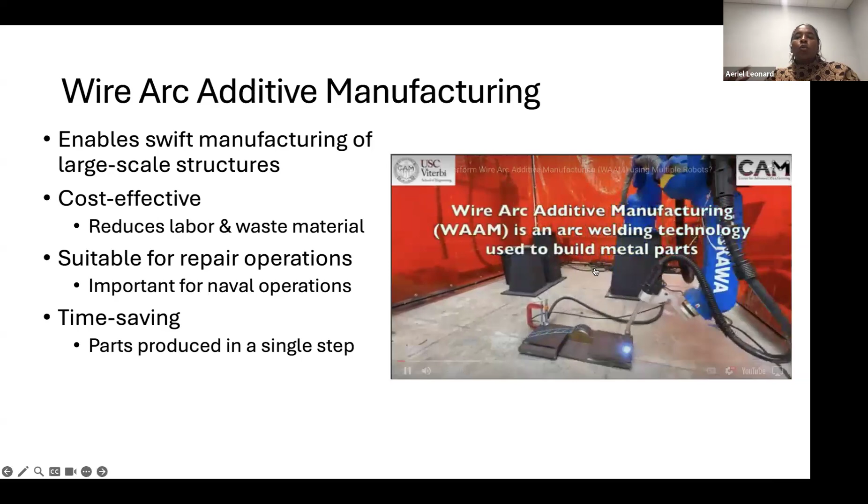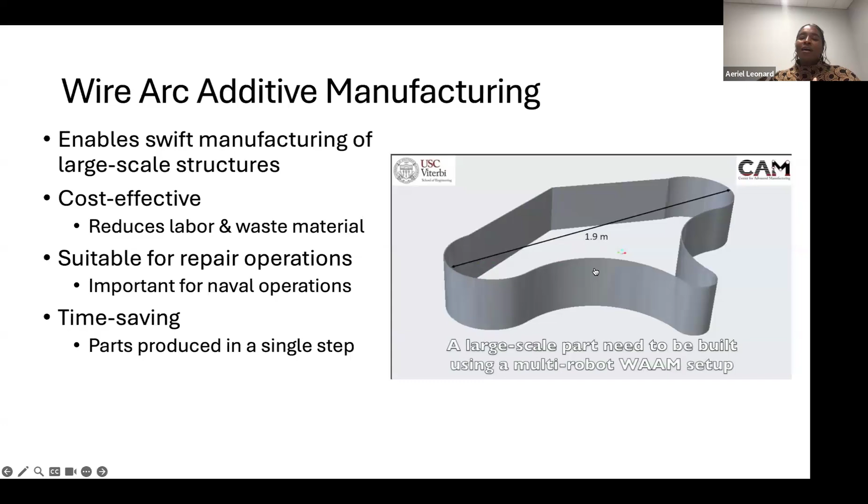So specifically, wire arc additive manufacturing is a way to print large scale structures. We kind of discuss wire arc additive manufacturing as this new innovative thing, but it's really just welding in a way. But because of the nature of the printing, you can really build these large things using robotic arms. Ship propellers are quite large, and this is a way to build those components.

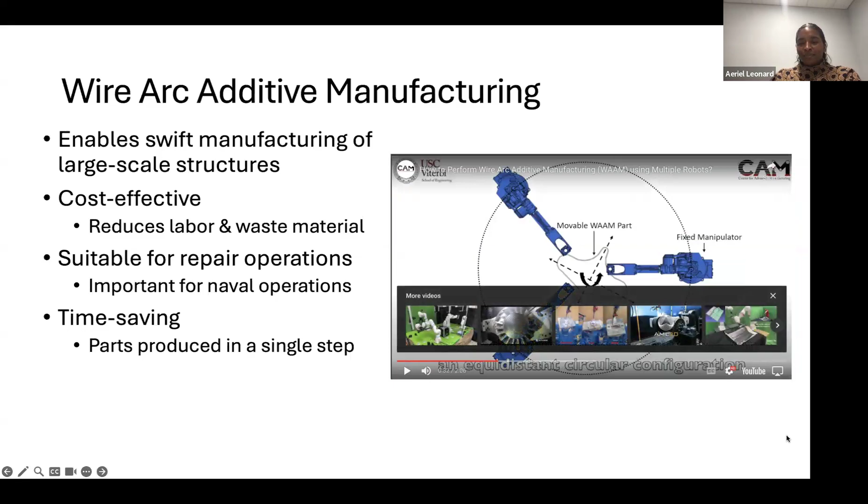So when you think of nickel aluminum bronze, it's this copper-based alloy. It usually has additions of iron and manganese, which are done to change the phases you get during processing. But it has excellent corrosion behavior, strength, and wear resistance. So if you think about things like ship propellers or underwater fasteners, it's a very good alloy that lasts a long time. It's actually quite old.

Some of the first literature on nickel aluminum bronze was from the 50s, and a lot of it was studying things like tensile behavior, understanding composition effects on that, as well as corrosion behavior. But in today's time, it would be considered a complex alloy—a microstructurally complex alloy and a compositionally complex alloy. A lot of that is because depending on how you change the composition, you can get very different phases.

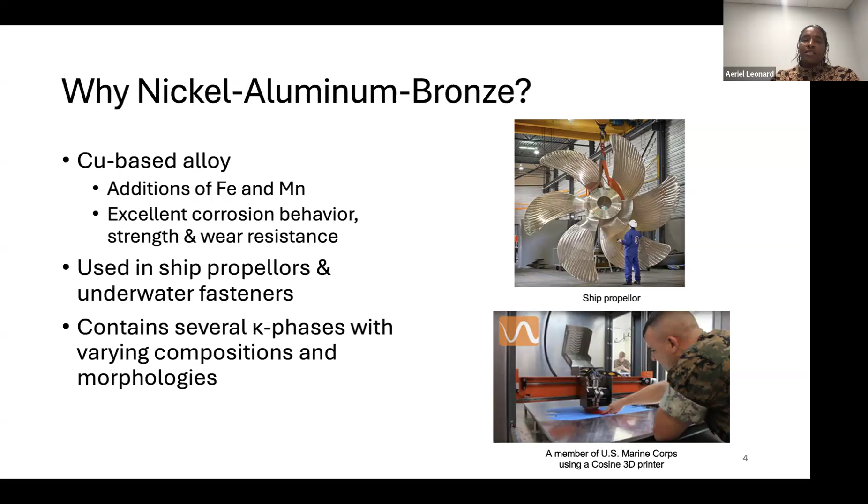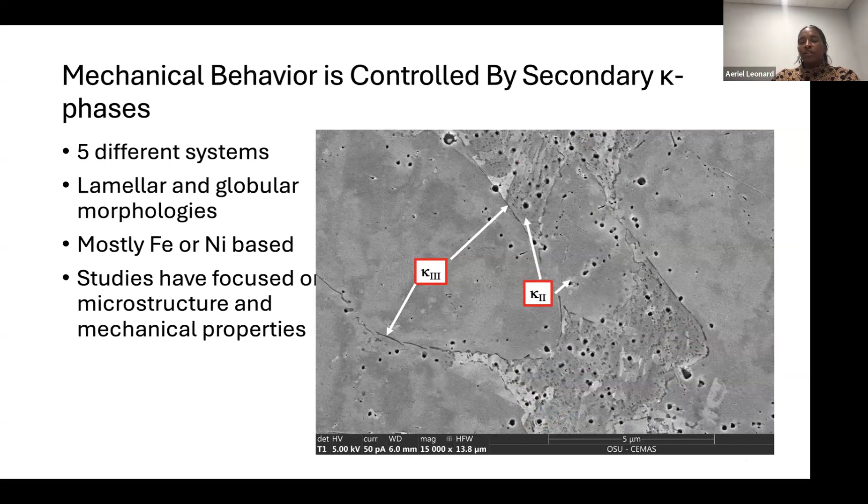Some of the most important phases are these kappa phases. In general, these secondary kappa phases have about 5 different systems. They can vary in morphology—lamellar, globular, spherical—and are mostly iron or nickel based. We'll talk a little bit about them going forward. It's very well understood that the microstructure and mechanical properties depend very much on the presence of these kappa phases, as well as their distribution throughout the material. So they're very important in understanding deformation mechanisms.

When we look at wire arc additive manufactured nickel aluminum bronze versus a cast and roll system, some of the things you can really see is that the microstructure is coarser.

One thing that happens in the cast and roll conditions is you get these large globular asymmetrical shape precipitates known as kappa 1. You do not see kappa 1 in the wire arc additive manufacturing condition, and that's because the solidification rate is much faster, so you don't have the opportunity to precipitate out that phase. It's very good from a mechanical property standpoint because this is a brittle phase.

And so a lot of crack initiation usually occurs at these large kappa 1 phases. Another thing you see are these lamellar type structures called kappa 3. Kappa 3 is a nickel-based incoherent phase in the material. Then you can see kappa 2 here, which are these larger globular phases that are also iron-based. And then there's kappa 4, which sits within the matrix of the material.

So I'll talk a lot about this later, but when we started on this project, our goal was to really see what is the fatigue behavior and how is that being driven by the observation of these different precipitate systems in the material. If we change the processing conditions in the wire arc phase, how do we change the microstructure? And then how does that influence things like fatigue?

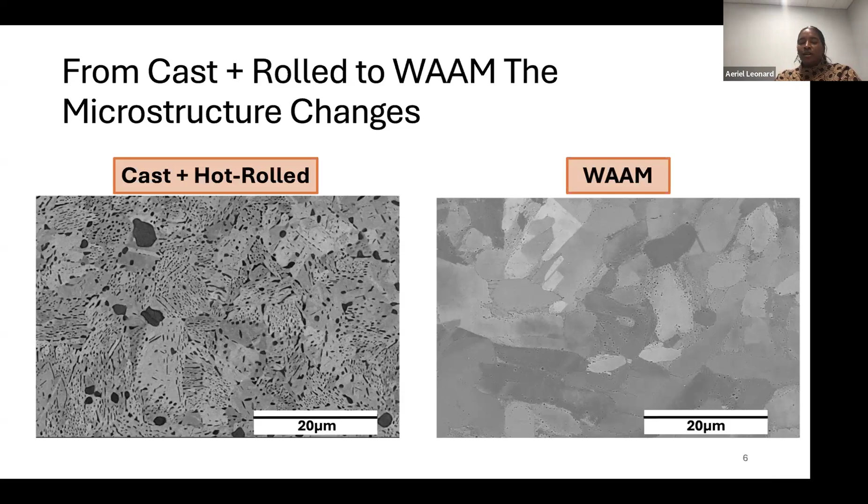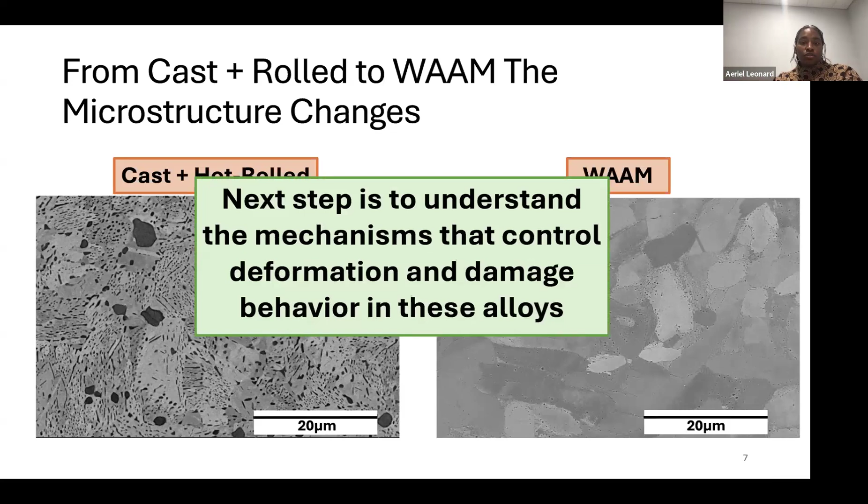But from really having an understanding that the microstructure between the cast and roll condition and the wire arc additive condition is different, really the next step for us is to truly understand the mechanisms that control deformation and damage in these alloys. So next, I'll talk about some of the materials that we've been using.

So this is wire arc additive manufacturing, and that's the composition of the wire. If you ask me about the WAAM conditions, I can't tell you too much about it because we get these made by a company called Gefertec, which is a German-based company that has pretty much perfected the printing process of nickel aluminum bronze, so they don't share much.

And it's really because of the nature of AM, so you're reheating, remelting layers, and so you're getting different heat affected zones. Solidification rates may change because of this reheating and remelting. And so it is well known that you can get varying microstructure along the bar, especially along the thickness of the layers.

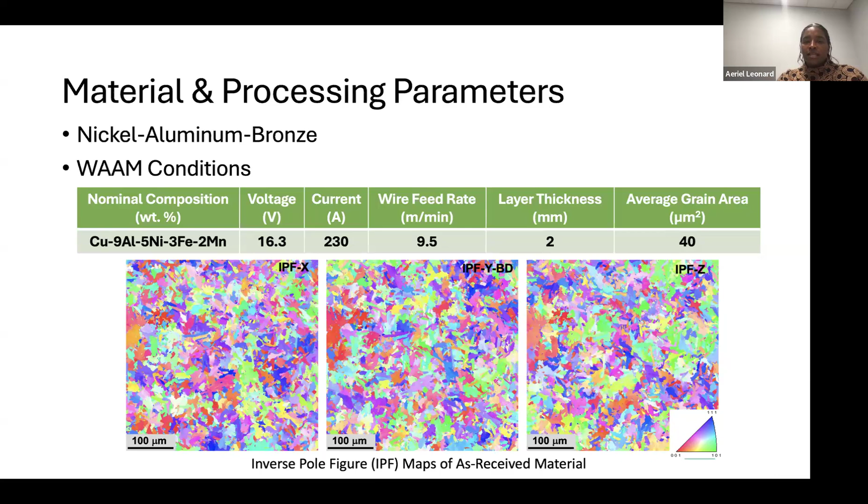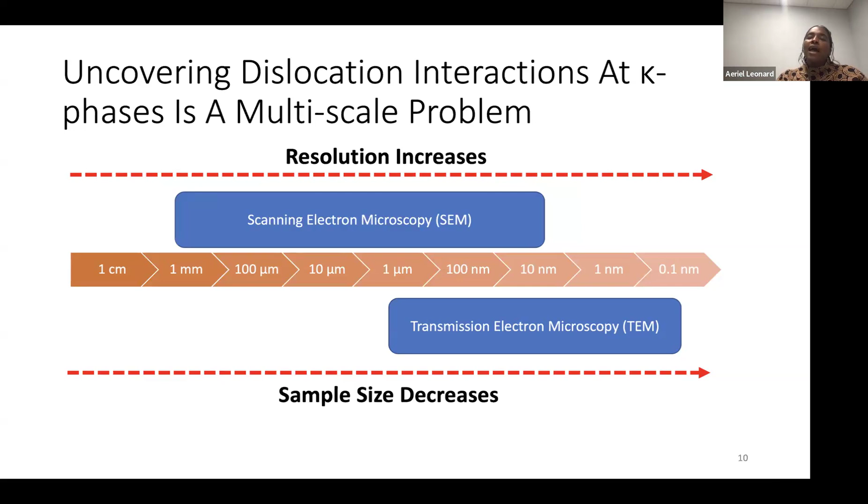As I talked about before, a lot of the limitations, even though this is a very old alloy and we don't fully understand the dislocation interactions, come down to the tools we had to understand this behavior. Because CEMAS has STEM and similar tools, we can see on an atomic scale how deformation is proceeding, which helps inform what's driving the deformation behavior. That helps us design an additive manufacturing process to get this microstructure consistently, or if we're repairing a part on a ship, to have the right parameters to achieve the same microstructure with good ductility and strength.

Next I'll talk about dislocation precipitate interactions during tensile loading. We wanted to start by getting an idea of the tensile behavior so we could provide better insight into what we'd see in fatigue. What we're learning is that the behaviors are actually quite different, and I'll talk a little about the fatigue behavior at the end. But that was our first introduction, really understanding the stress-strain behavior to inform us as we start cyclic experiments.

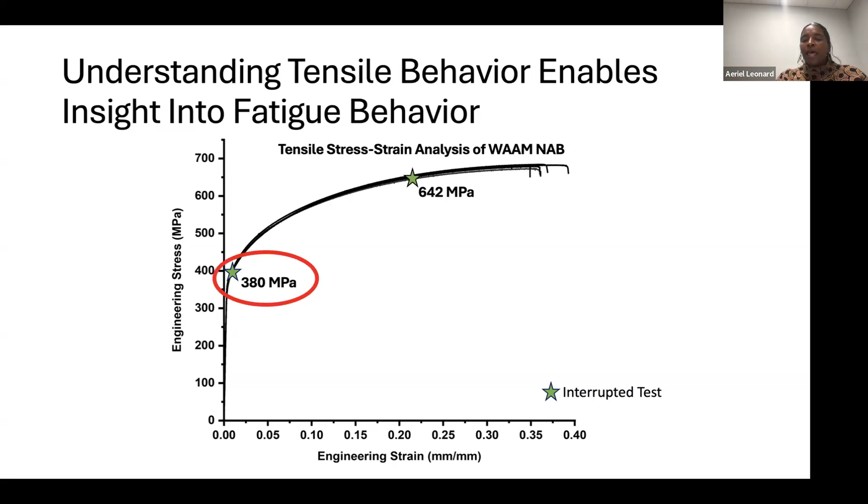We tested several samples to get a true understanding of the tensile behavior, then interrupted tests either at the yield or near the UTS to see how changes in strain affected the dislocation behavior as it progressed throughout the material. We'll start by looking at the sample interrupted near the yield stress.

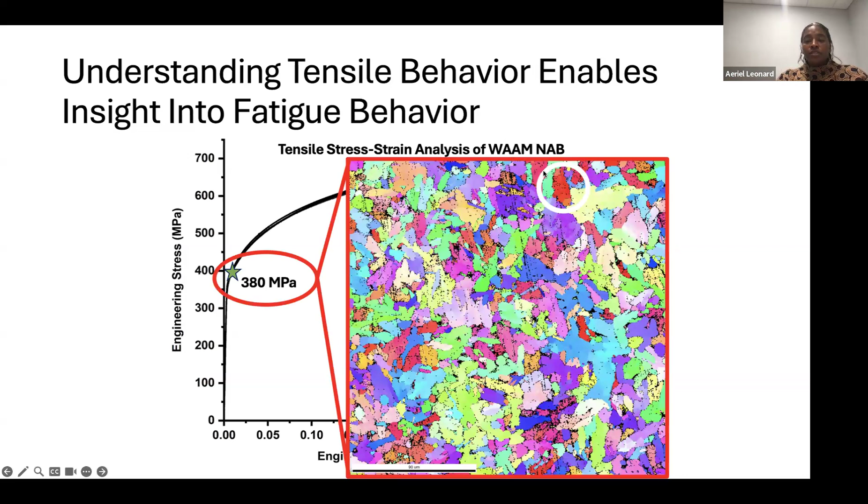This is the as-deformed microstructure in this area, and this is the region of interest where we did a lot of deep characterization to get a true understanding of the deformation mechanisms.

Seeing the stacking fault ribbon was extremely interesting because, of course, slip bands are expected to occur in the material, but after combing through the literature for months, we had never seen anyone report stacking fault formation in this material. We hadn't seen stacking faults mentioned even in newer literature from around 2023. So that was in the back of our minds: we're seeing stacking faults, and some interesting things are going on.

Another thing we noticed was Kappa 4 - you can see a small nanoscale phase sitting in the matrix. I have better images elsewhere, but we also noticed larger precipitates sitting along the grain boundary, which become important because a lot of the old literature, and even some newer literature, reports these.

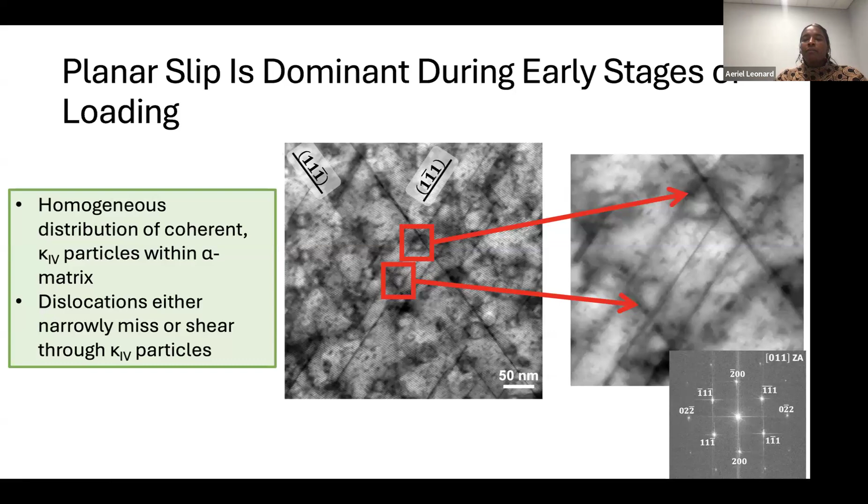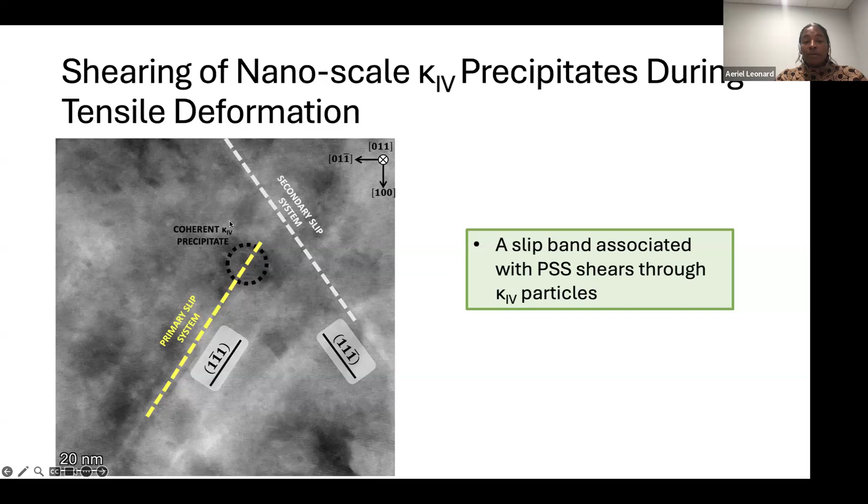If we take a closer look, here is our Kappa 4 particle with dislocations traveling along the primary slip system. We can see that the primary slip system shears through the coherent Kappa 4 particle - it's clearer here - and then we can see there's this secondary slip system.

And the region here is really undistorted. So it lets us know that that dislocation does not intersect the secondary slip system, and that there's some interactions between the stress fields of those dislocations that's preventing that transmission.

So again, we're starting to see some of the hardening mechanisms that are occurring at these early stages of loading in the material. Now, if we take a closer look, if you're familiar with center of symmetry analysis...

What it's looking at is how the atomic positions are deviating, calculating this M sub n parameter. The higher that parameter is, the higher the deviation in the atomic positions, meaning you have some deviation in the stacking sequence. The lower that number is, there is no deviation in the stacking sequence.

So by performing this center of symmetry analysis, what we learned is that we have a full dislocation that's separated into two partials. It's not hard to believe, this is a copper-based alloy. And the leading partial shears through the precipitate, leaving behind an intrinsic stacking fault.

What happens, and we know this from looking at samples at higher plastic strains, is that the trailing partial stays behind. It's almost stuck, pinned at the interface here. And they never actually recombine, as we'll see in later images. So the stacking fault stays in the material.

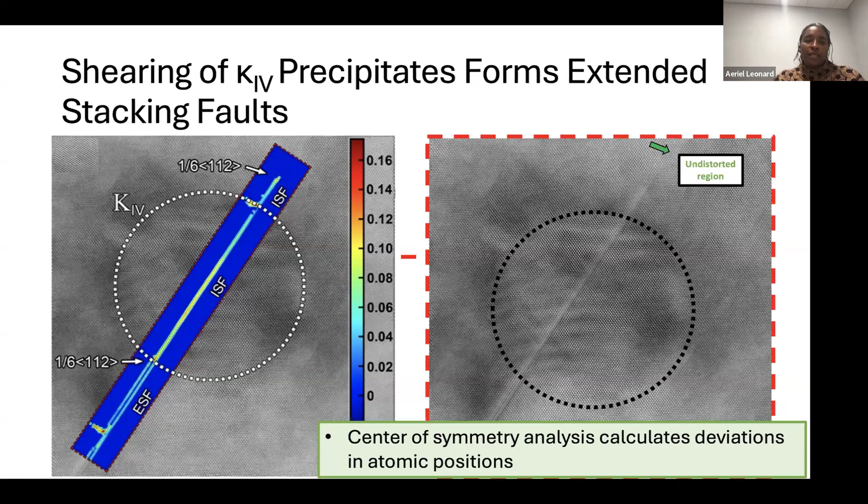We also learned that we have these extended stacking faults. We can see here outside the sheared precipitate that we have this extrinsic stacking fault. And we'll talk a little bit about what we think is happening to form extrinsic stacking faults in the material.

Now, one thing I talked about earlier was that we were seeing these grain boundary precipitates in the material. And what we had learned from literature was that people were referring to this as a new phase called kappa 5.

Through a lot of work, what we learned was that there was a zone of about 200 nanometers from the grain boundary that was depleted of these coherent kappa 4 particles. You can kind of see here the coherency strain, or the coffee bean contrast that you normally see from coherent particles in the matrix. And you can see within this region that there aren't any of those precipitates, and that you have these very large, flat precipitates sitting in this zone.

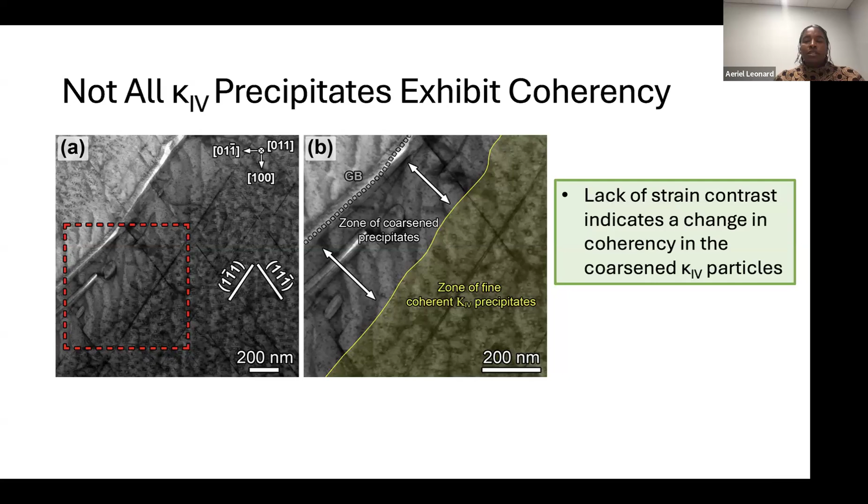And what we learned was that those were coarsened kappa 4 particles, and that they did obstruct dislocation motion. The reason why they obstructed dislocation motion is because they weren't just coarsened kappa 4 particles by themselves. They actually had the segregation of nickel and aluminum at the interface, so they were this shell-like structure with a kappa 4 core and nickel aluminum segregated along the interface.

This was not actually new. Even papers into the 70s had reported this coarsening and segregation of nickel and aluminum along the interface. And really, what we learned through looking through the literature is this actually was a heat treat phase that could happen at 350 degrees Celsius.

And it was very interesting because in the wire arc additive manufacturing process, the chamber itself is kept at 350 degrees Celsius. So it was right, we didn't plan that. It was right on with what older literature had seen. So we knew that this was a heat treat phase that was actually happening during the processing.

So in the wire arc processing procedure, if we're printing 10 bars, the first layer of each bar is printed, and then the second layer of each bar is printed. So because we're holding the chamber at 350 degrees Celsius until the last layer is printed for every bar, it's pretty much getting a heat treatment as the printing process is progressing.

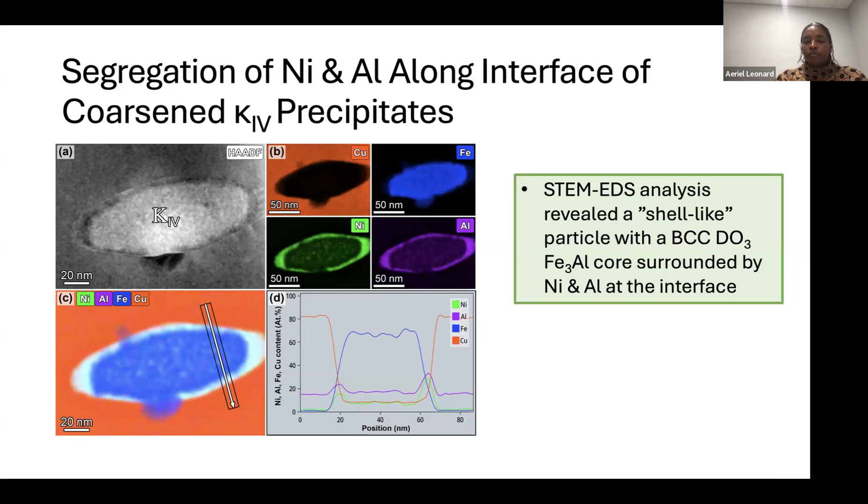So basically what we were seeing was the coarsening of kappa 4 and the segregation of nickel and aluminum along the interface. When we took a closer look, in general coherent kappa 4s have the Nishiyama-Wasserman relationship with the alpha matrix. What we learned with this shell-like composite particle was that it created an 8-degree misorientation between the cubic axes of the matrix and the composite.

So it deviated from this Nishiyama-Wasserman relationship. And what we learned through some of the more characterization that we did was that this did hinder dislocation motion. Now, does it have a large effect on hardening? Not so much, right? It's very few of them, and they are really few of them at each boundary as you go along.

But it was an important finding because it wasn't Kappa 5, which people had said it was, and it wasn't Kappa 2 either. Kappa 2 is another iron-based phase that people, because of the globular shape, will sometimes just say, oh, it's globular, so it must be Kappa 2. What this showed us was that all of these things in literature reported as Kappa 5 and Kappa 2 probably are just this kind of shell-like composite structure.

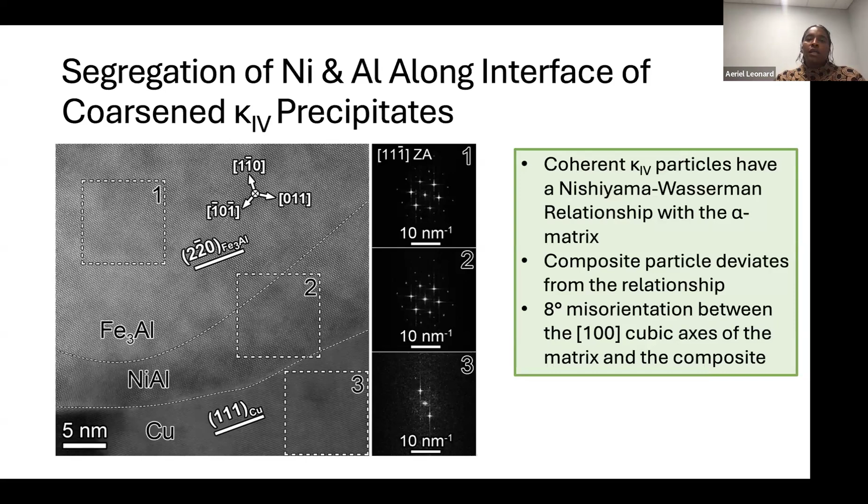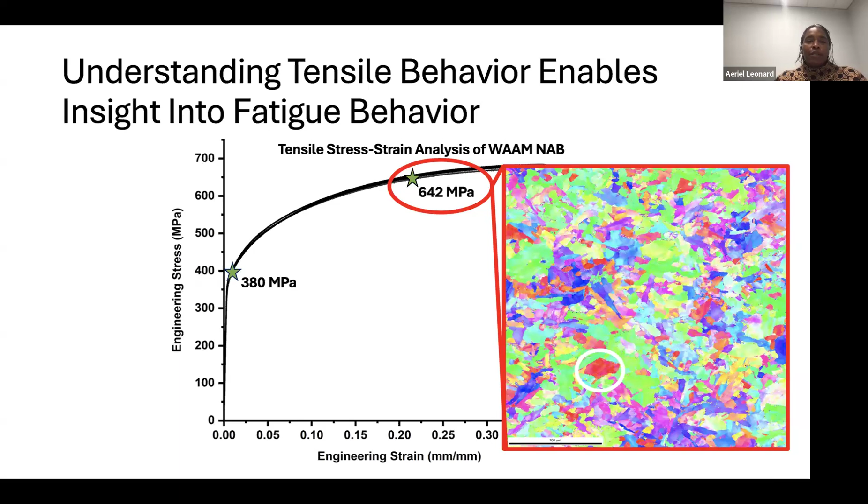So then what we really wanted to see was, as we progress to higher levels of plastic strain, what is happening in the microstructure? So we used EBSD to see where we had a grain that we knew had multiple slip systems active in the material.

One of the things we wanted to see was where strain is localizing. So we use EBSD to look at how the orientation was changing from region to region through the kernel average misorientation technique. What we learned is that the majority of what we're seeing is strain localization within the alpha grains, which isn't hard to believe. I showed you some of the stacking fault formation and planar slip in the grain, but also along these interdendritic regions where we know we have Kappa 2 and Kappa 3, there was high levels of misorientation.

In this material, we wanted to take a closer look at the other precipitate systems like Kappa 3 and Kappa 2. When we looked at Kappa 3, which is an incoherent lamellar phase, we can see that there is high elastic strain contrast along the interface of the precipitate, indicating localization of strain. Because fatigue is really our overarching goal, to understand fatigue behavior, this let us know that this precipitate or the interdendritic zones themselves could be possible sites for crack initiation as we start to look at things like cyclic deformation.

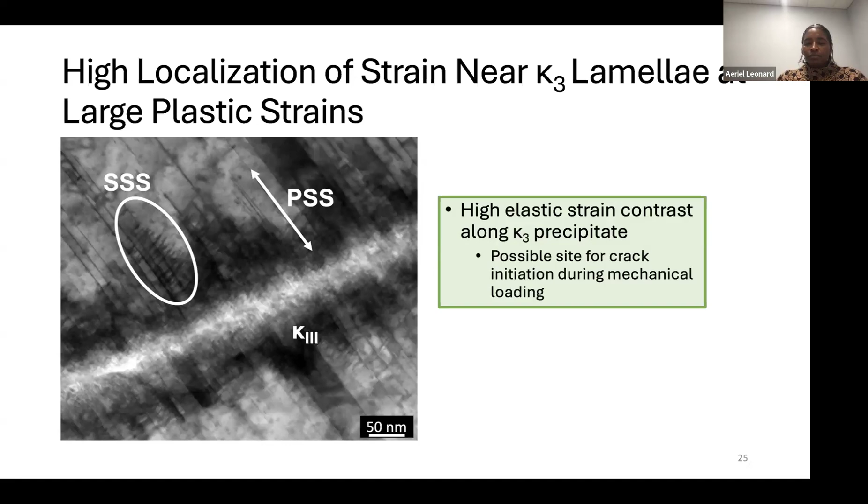Another thing we noticed at the higher strains is that planar slip is dominant. We do not see tons of cross slip in this way - in the traditional sense of cross slip, we don't see a lot of it. Planar slip is really being facilitated by glide plane softening. You could imagine one dislocation goes through, destroys the order, one partial goes through, destroys the order, which makes it easier for other dislocations to follow along.

So you get an easy path for slip throughout your matrix. It's important when you think about it from a hardening mechanism standpoint, because it's an easy path - as the dislocations approach the grain boundary, they start to pile up. What we saw before in some of the earlier things we talked about was that deformation was really constricted within these grains, and we really weren't seeing a transfer of slip from grain to grain.

Now, some of the work that Nathan is doing in fatigue, we actually do see some slip transfer from grain to grain. But in this specific case, we weren't really seeing a lot of transfer from region to region in the tensile category. Regardless, we have a lot of planar slip because we have a lot of Kappa 4 particles - a lot of particles that are being sheared throughout our matrix. All of this is helping facilitate this kind of glide plane, or planar slip, that we're seeing in the material, which is interesting.

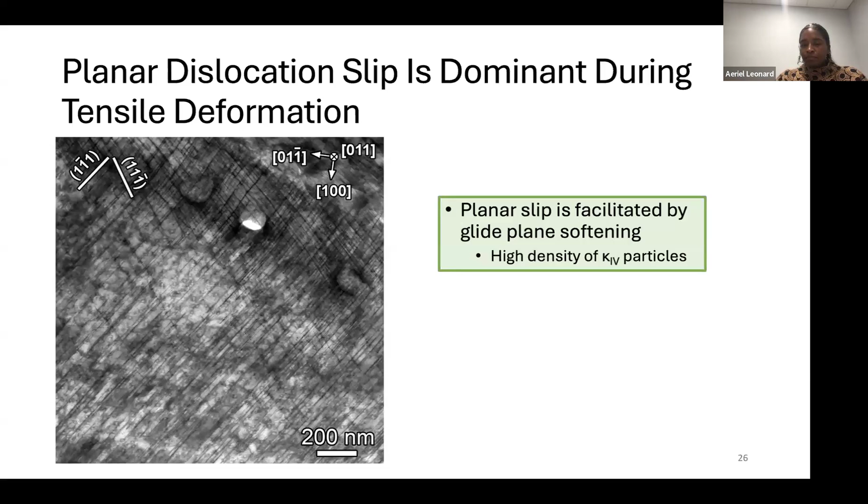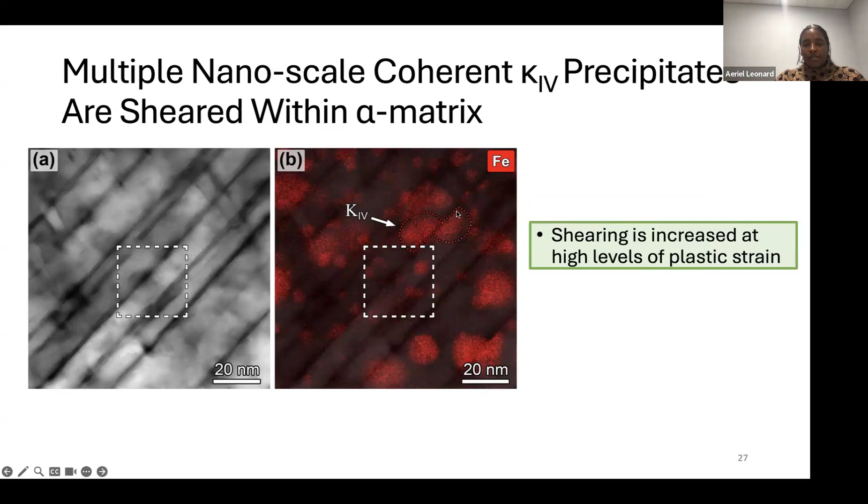So as we look closer at these higher levels of strain, what we can see is that we have a lot of sheared Kappa 4 particles. Kappa 4 is iron-based, so you can see there are a lot of sheared particles. This is a very nice one here.

If we take a closer look, we can see that within these regions, we have extrinsic and intrinsic stacking faults, as we saw earlier, but something we have now that we did not have before are deformation twins. So at these high levels of strain, we're reaching the stress levels needed to form deformation twins in our material. Stacking faults and twins are very important because they also help facilitate hardening behavior in the material. So again, really understanding what is driving the strength in the material, but then also because we have a lot of easy paths for dislocation motion, also helping facilitate an increase in ductility in the material as well.

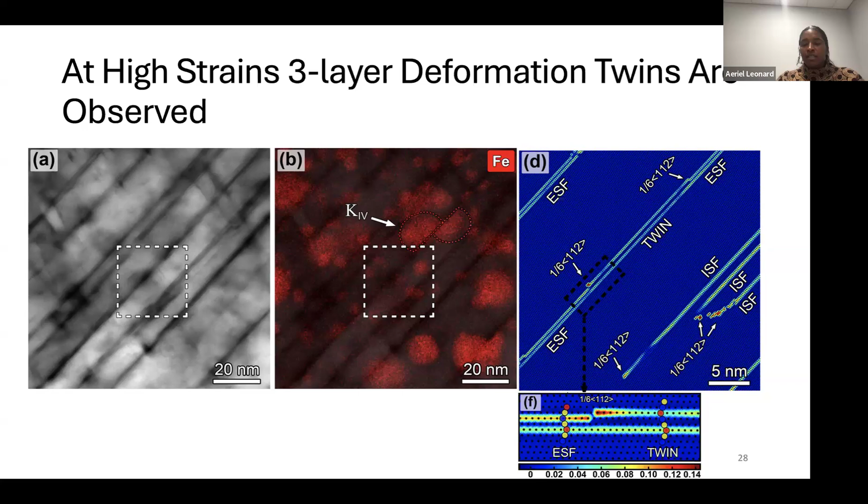So let's talk about why we might be getting stacking fault formation and twin formation. In general, when we think about cross-slip, we think, okay, well, if we have two partials, the only way they can cross-slip is if they recombine into a full dislocation and then they can cross-slip. So that's just the traditional sense of the mechanism of cross-slip.

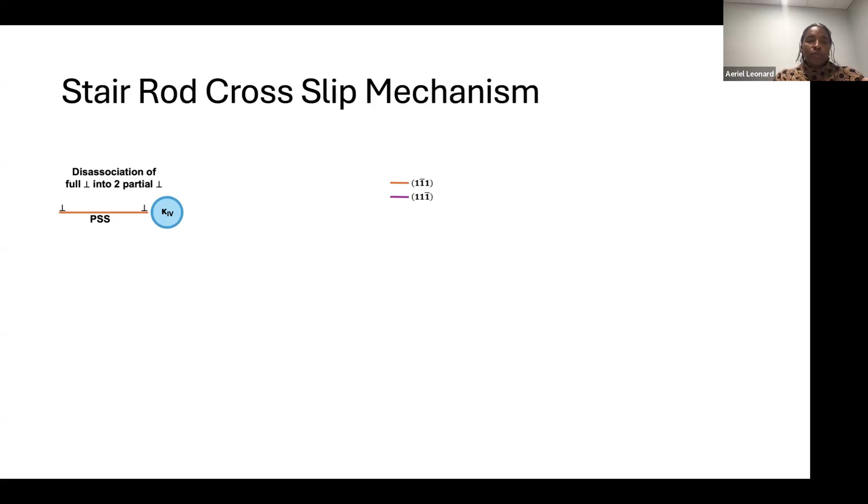But what we've learned from other materials like TWIP steels, or some of the high entropy alloy work that Mike has done, is that you actually can get partials to cross-slip by forming a sessile stair-rod dislocation. So from a mechanistic point of view, you have a full dislocation that's dissociated into two partials. The leading partial shears the precipitate, the trailing partial, in some cases, gets stuck. So now we have an intrinsic stacking fault that is formed.

As we keep progressing, we know from our material that we have activated secondary slip systems. So now we have a secondary slip system coming, and we have two partial dislocations. It's energetically unfavorable, so what the first partial does is it creates this sessile stair-rod dislocation here, and then it cross-slips to the plane above. And so that creates an extrinsic stacking fault.

As we keep going at high levels of strain, we have more slip systems to be activated. So now we have another partial that's interacting with the extrinsic stacking fault and forming a three-layer twin. This is something that has been reported in TWIP steels as a way to form deformation twins from stacking fault formations in the material.

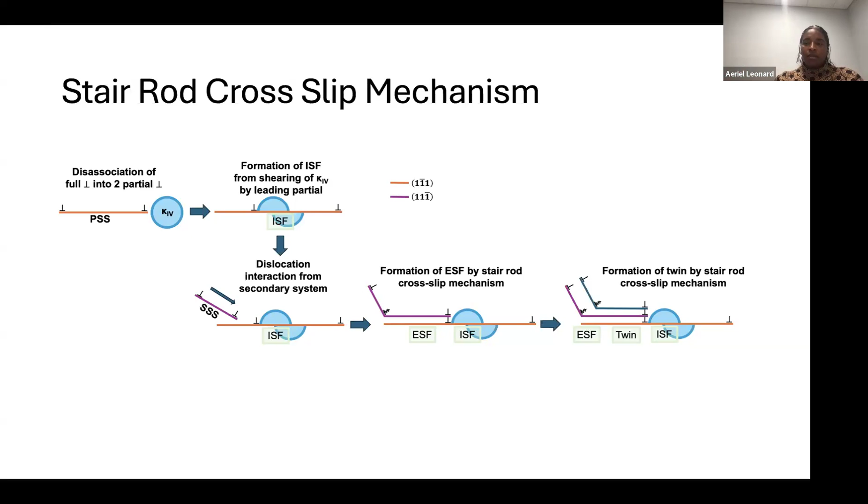All of this is really important because this is a hardening mechanism. So when we're seeing this increase in strength, there's a lot of ways that this is being driven. We talked about that we have kappa 2 and kappa 3 that restrict dislocation motion in interdendritic zones, so that's contributing to hardening.

We have some coherency hardening from our kappa 4. Kappa 4 is also facilitating planar slip, so dislocations have an easy path. They go to the grain boundary. We know they don't transmit through, and so that's hardening. So there are lots of hardening mechanisms that are happening in the material as well.

It's not just our kind of initial understanding that, oh, we have some precipitates that are blocking dislocation motion, so that must be why we have hardening in the material.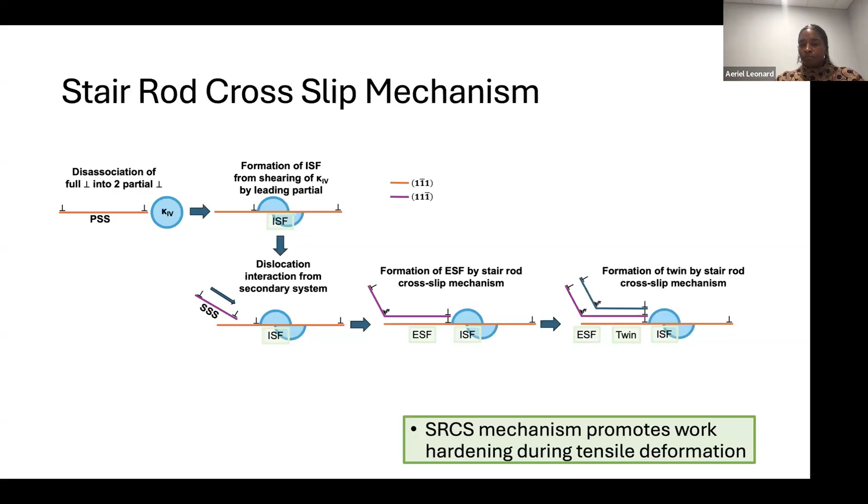So what we found, when we looked at the low cycle fatigue conditions, is you can kind of see this stair-rod dislocation cross-slip mechanism kind of in action. So we see some evidence. This is in fatigue that we have this intrinsic stacking fault here from another system that's pretty much just interacted with the original ISF and created this extrinsic stacking fault.

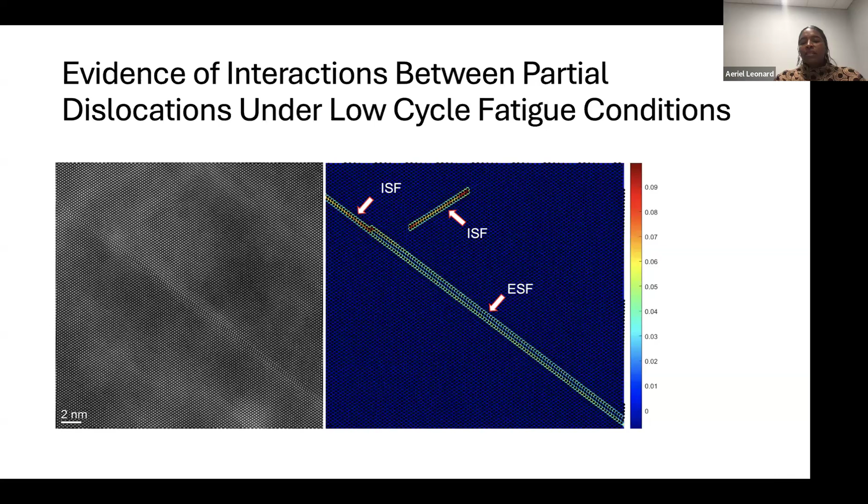So what the tools that CEMAS has allowed us to do, and the reason why I titled it kind of reviving an old alloy, is what the tools have allowed us to do is not necessarily say, okay, all of the people in the literature are wrong, because when we look at their mechanical properties and our mechanical properties, they're spot on. We actually have pretty much very similar mechanical properties, but it's really just not having the tools to truly investigate deformation mechanisms.

To really truly understand in the microstructure what is contributing to this increase in hardening or strength that you get when you look at the wire arc condition compared to the coarser microstructure that you get in the cast condition.

And also being able to have a lot of these tools allows us to see that these are not new phases. These phases have existed for time, but now we can really understand what is the misorientation when you have a coarsened kappa 4. How does that influence dislocation motion in the material? And truly being able to quantify these things that are happening during deformation.

And so these tools are very important because, as I said before, if you think about it from a Navy aspect, if I'm on a ship and a part fails and I can just repair that part using a wire, I have a microstructure that may not be able to carry loads that it would to stay at sea for another 200 days, but it may be able to carry the loads to get me home.

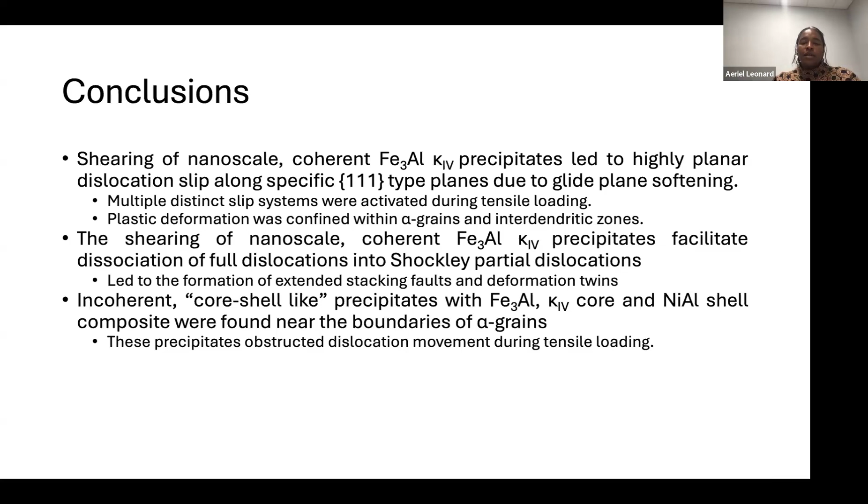We think that this stair-rod cross-slip mechanism is really facilitating the formation of these extended stacking faults and deformation twins in the material, and that we do have these incoherent core-shell-like precipitates with an iron-aluminum core and nickel-aluminum around the boundaries that also obstruct dislocation motion at the interface.

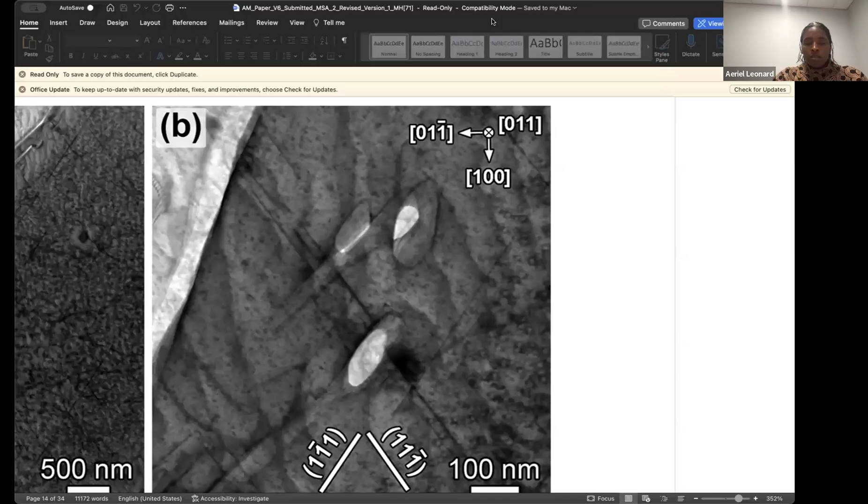If we go back to the original presentation, to when we were looking at the yield stage, this was basically what we were seeing. Here they are sitting near the boundary, and it was hard to tell if this was an initiation point, because of the curvature—there was definitely some relaxation—but either way, you could definitely tell that they were preventing dislocation motion.

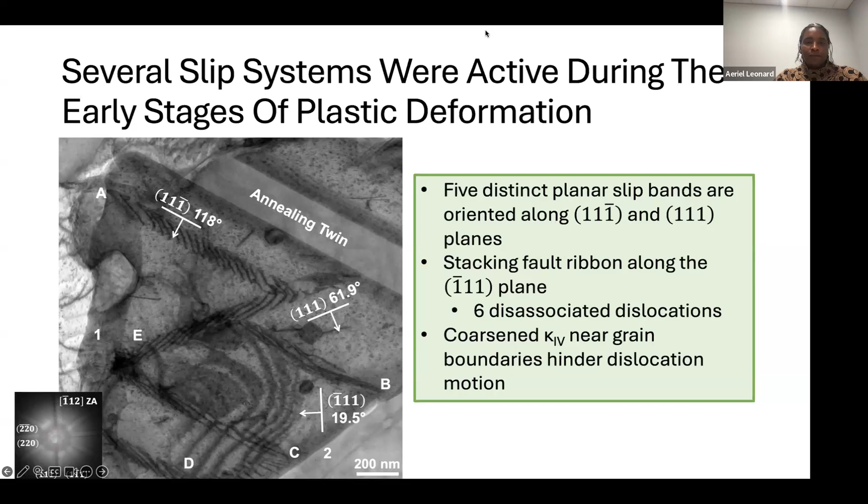Any other questions? Anything else, Brian? Yeah, that would be interesting, actually.

I agree, to see using centrosymmetry to see. We didn't, because at the time we were focused so much on the Kappa 4, that's really where we were spending a lot of our time. But Josh is continuing a lot of the work that Milan and Veronica started, and that's something we're definitely looking at—not just the shell-like precipitates, but Kappa 3 and Kappa 2 as well, really getting an understanding of what's happening there.